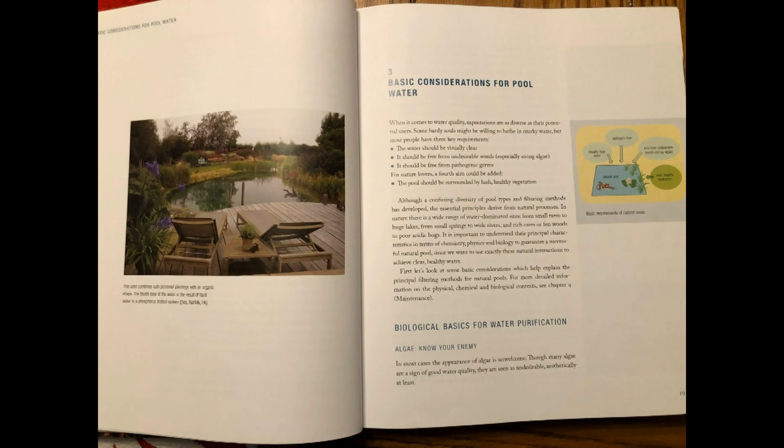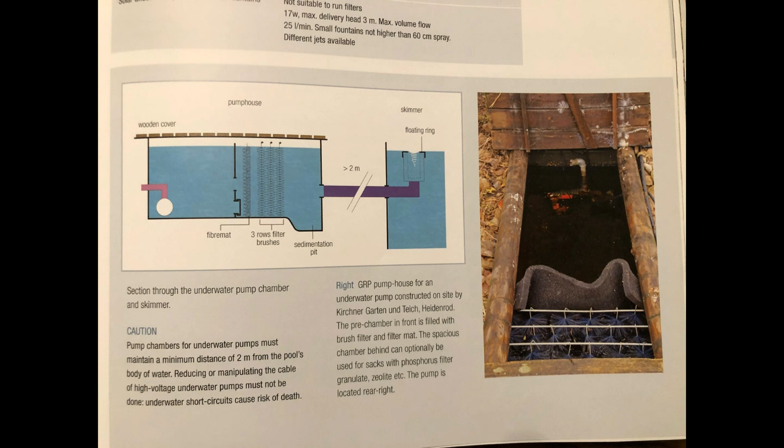Kircher and Thon walk you through the types of natural pools and different methods to maintain water quality. They provide technical guidance on sizing of pumps, pools, and treatment zones. However, note the units they use are standard international, not English. They cover the types of plants that can be used to clean your pool and keep your little ecosystem healthy.

The design I chose was a technical wetland using a waterfall for aeration. I have a 60 GPM pump which circulates water from a pond skimmer through a limestone biofilm zone, from which it overflows into the wetland section filled with cattails and reeds. After filtering, the water travels through a stream and returns to the pool via a waterfall.

In addition to the piping to the treatment zone, I also incorporate a recirc line to provide a current to push water back to the skimmer. The recirc line also contains valving to discharge directly from the pump to my yard for when I vacuum sediment from the pool floor.

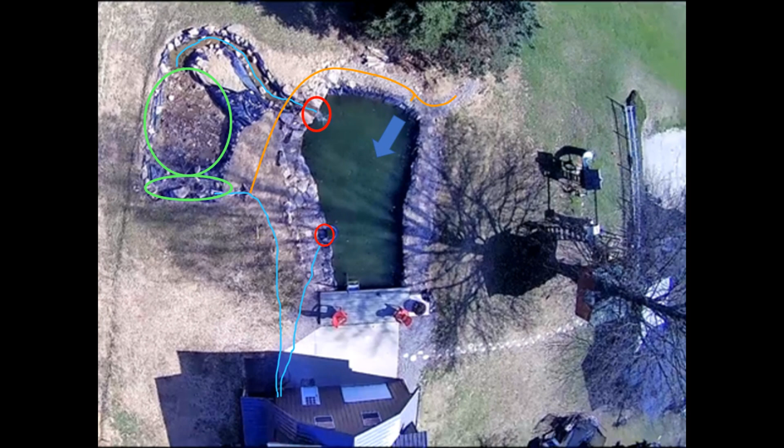The pool is 35 feet by 20 feet and slopes from 3 feet deep to 7 feet at the deepest point. The treatment zone is 40% of the size of the pool itself, which is 13 feet by 25 feet. Now here's how I did it.

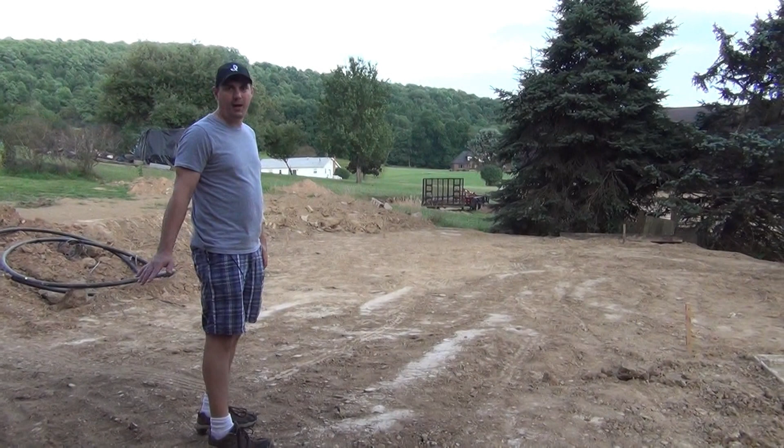As you can see, I've leveled the ground where I'm going to put my pool. And I've staked out the corners of my area that the pool is going to be in, but now we're going to give it a natural shape by laying down some garden hose and giving it some curves.

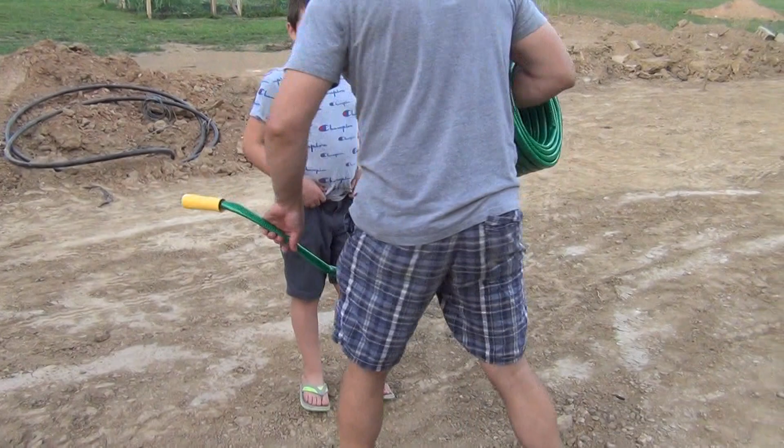Okay, so we're going to lay down the garden hose in between our stakes. Instead of laying string, I'm just going to use an imaginary line between the two stakes. Kind of give it a nice curve, but not go too far in or out of that line. All right, so we'll lay down the garden hose, which is stiffer than a rope, and it'll give us a nice smoother edge. Try and get the curves out of it.

Okay, once you have your layout set with your hose, then you get some marking spray paint, and you're going to go ahead and trace the hose.

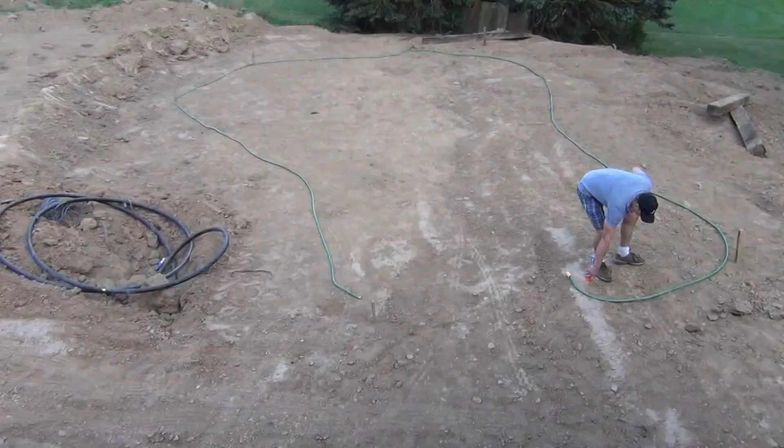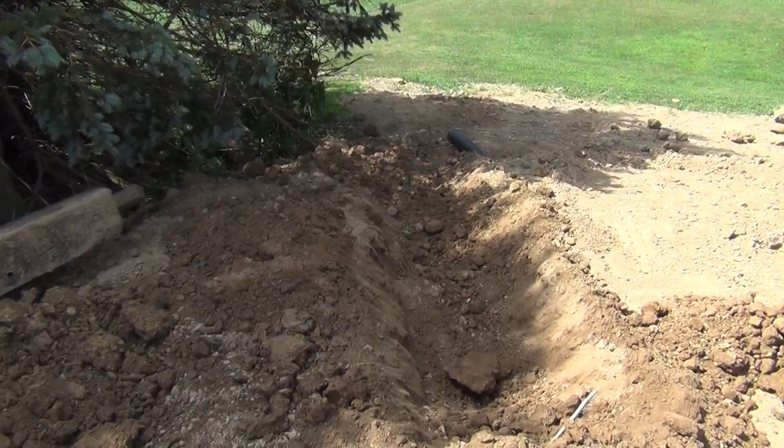The next step is to dig a trench around the perimeter of your pool, which will be used to hold your liner in place. I dug a trench in the corner for my overflow to go. The trench is about a foot deep. It's just enough to hold the liner in place once rock is placed on top of it.

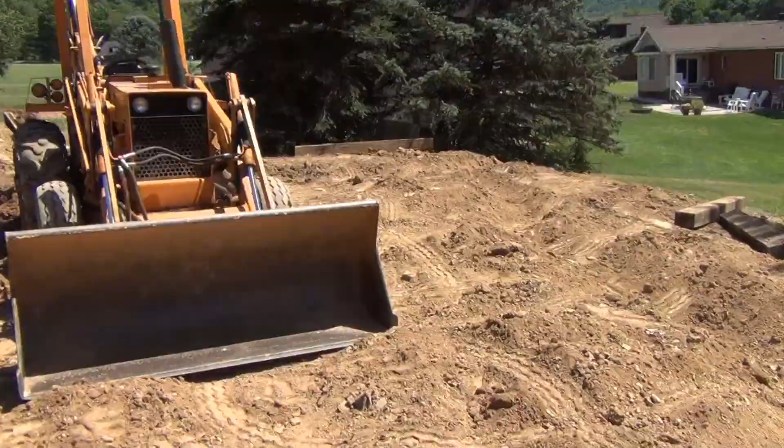Alright, now I'm going to work out and find out where the bottom of my slope is, because I have to angle it down. Don't want straight down, again, don't want too shallow. So at this shorter, shallow end, it's only 1 foot, and then the deeper end, the base of the slope is wider. So I got 1 foot here and then 2'4" over there.

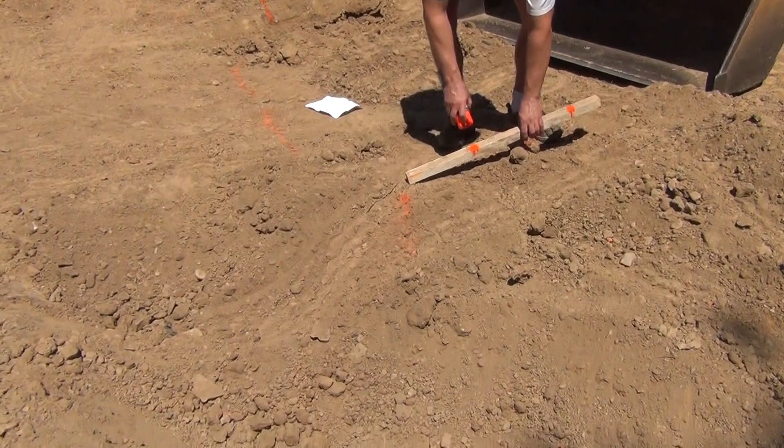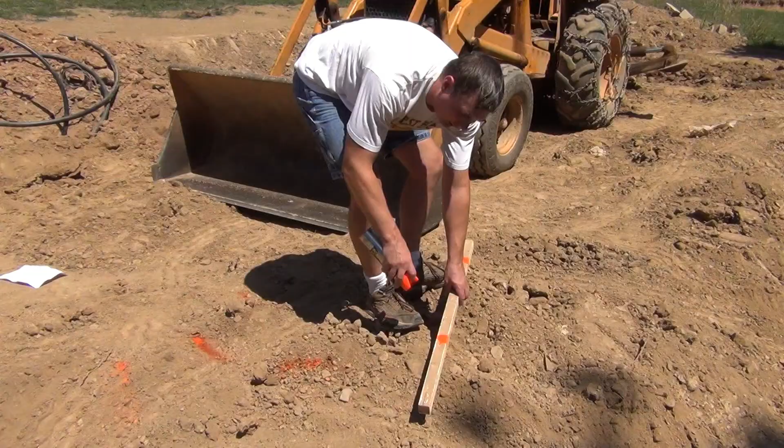So I'm just going to work my way around and determine where my perimeter is off of where the bottom of my slope will be. And I'm just kind of eyeballing this from where my line was. And now I'm out here towards the deeper end, where it gets deeper. Now I don't want to go 1 foot, I actually want to go further, so I'm going to go about halfway now.

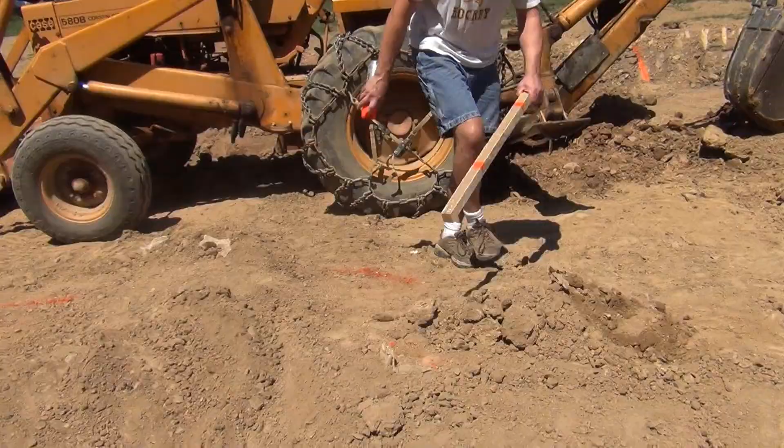Next easy line. And now I'm at the deepest section for my mark. I'm going to go my deepest slope. And that's going to go the whole way off of this back wall. Okay, I connected the dots.

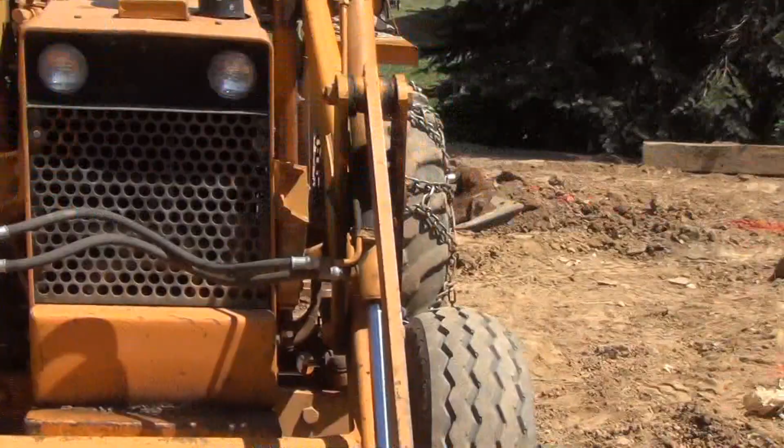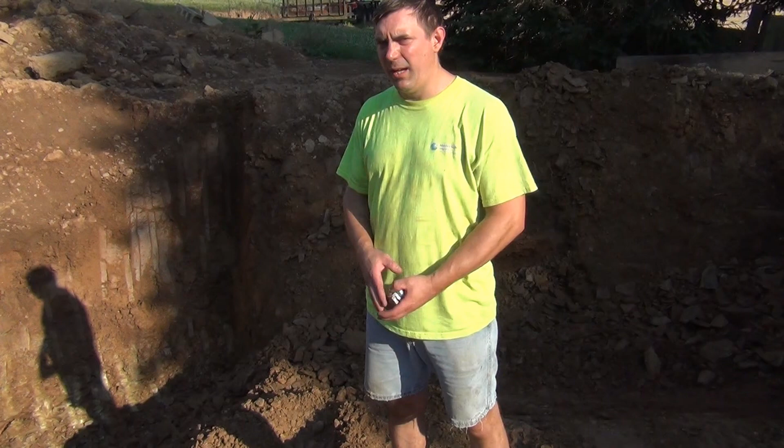This section back here is where my waterfall will go, and it's going to be straight down, so I'll be digging that back further. Now it's time to start digging. Okay, so I've dug down far enough. I'm going to install my retaining wall.

And the purpose of my retaining wall is so I can have a vertical wall in my deep section below my waterfall. So rather than hauling all this dirt out and making this too steep, I'm going to build my retaining wall first and then dig this section out and dump it behind the retaining wall.

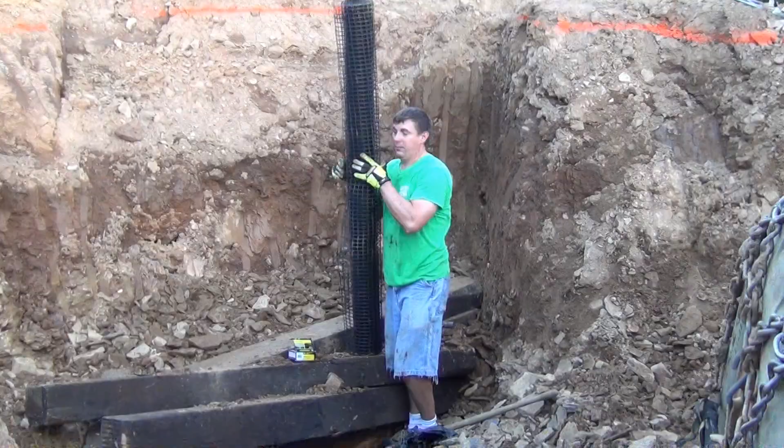Ten-inch spikes, 4 per tie. Okay, so I got 4 rows of ties down. Now I'm going to start reinforcing it. I'm using Geogrid. It's a fiberglass reinforcement. It's really good for reinforcing walls, so I'm going to lay this down in a couple stages, and this is going to be my first stage.

Okay, now that I got it cut and laid down, I'm going to nail it down, and then when I lay the tie on top of it, the weight of the tie plus the spikes going through will also secure it, besides the little nails. This is kind of just to hold it temporarily.

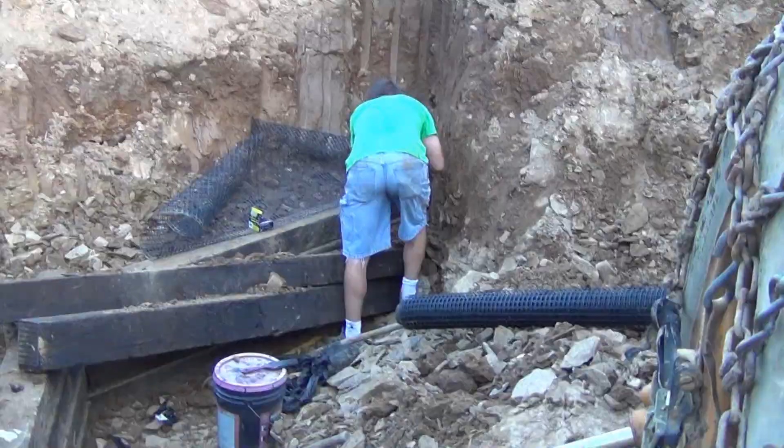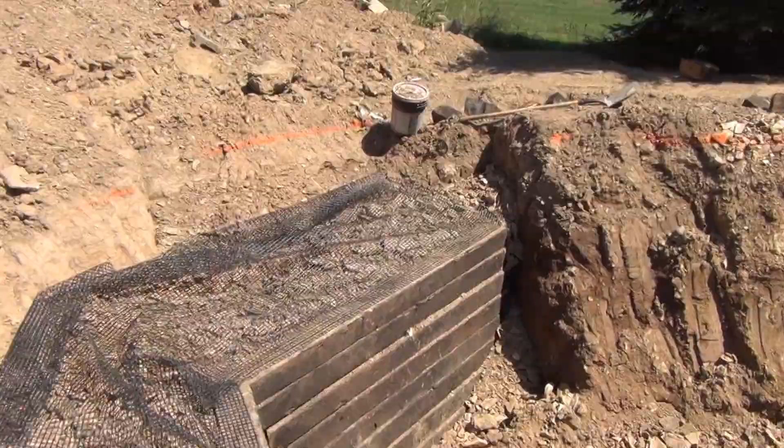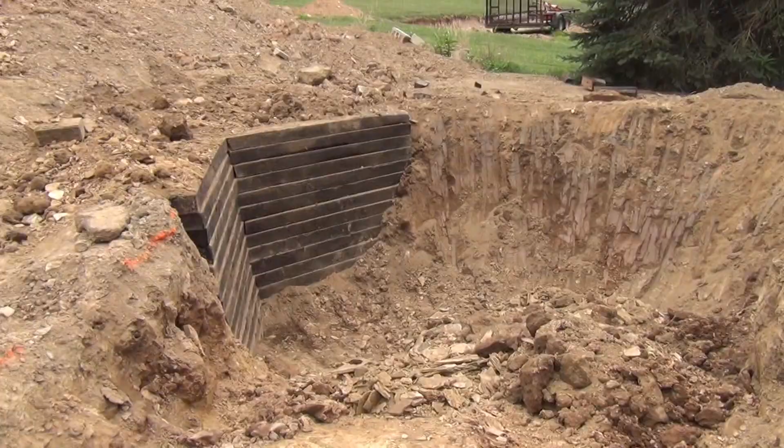Okay, so I've added 6 more rows of ties. I'm putting another row of Geogrid down, and I'll finish up the last 3 or 4 rows here to get to my final height for the retaining wall. Also excavated some more dirt out of the dig site. Had to work it down a ramp. Okay, after completing the wall, I backfilled it. 14 rows of ties, and start shaping the deep end.

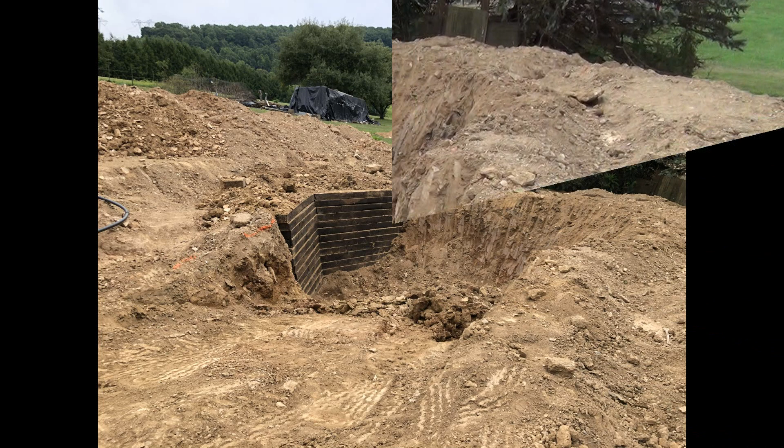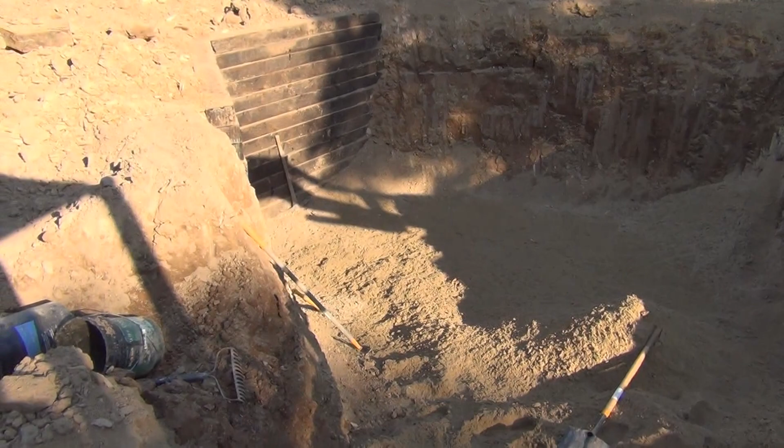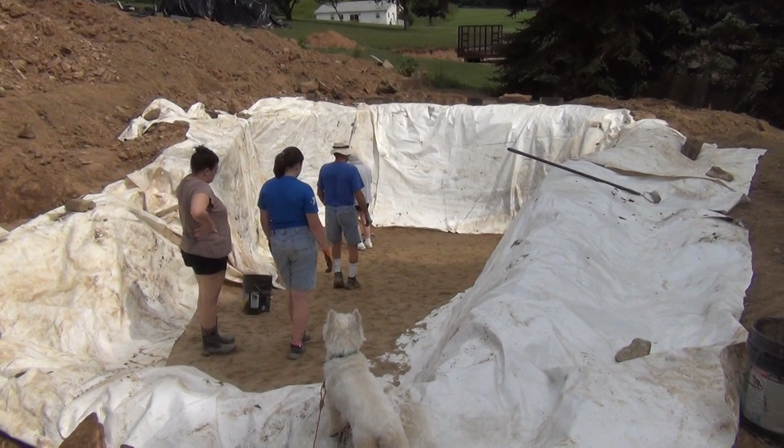Okay, so I raked all the large rocks, which I have tons of sharp rocks, which makes me nervous, but I raked all the large rocks out of the lower, deeper section, and then I backed in the trailer and dumped sand, and now need to spread that out. After spreading out the sand, we laid a layer of extra plastic over the slopes to act as a buffer between the dirt and the liner.

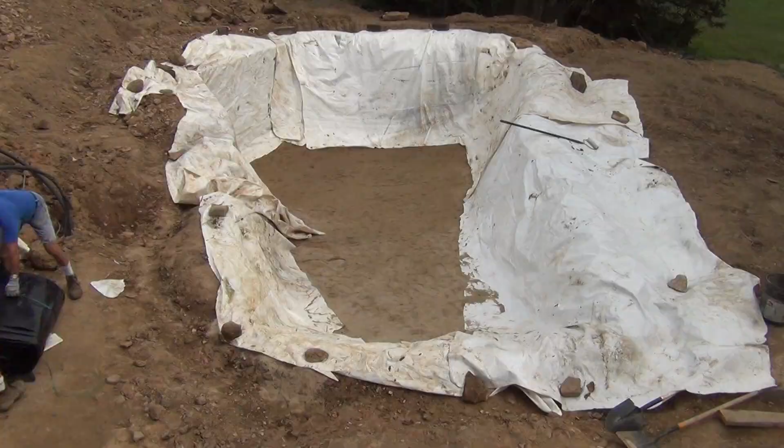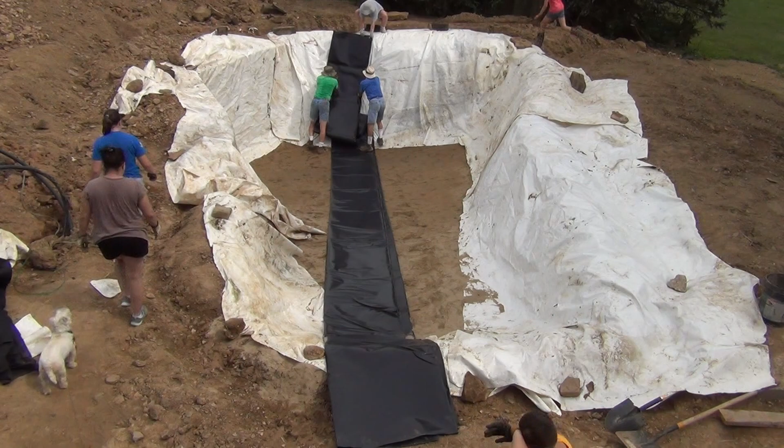The pool liner I used was 30 mil reinforced polyethylene, 50 feet by 43 feet, oversized to allow for slope and contouring. With the help of the family, we were able to maneuver it around, leaving slack to allow for settling when it's filled with water.

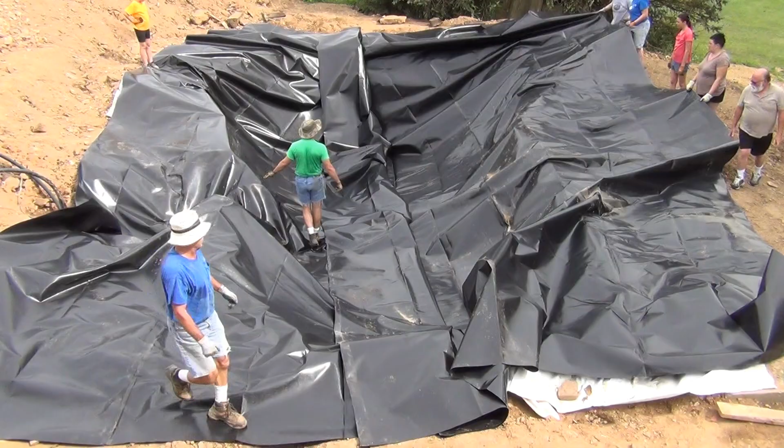A critical step is to make sure that you contour around the edges, leaving enough slack. Otherwise, the polyethylene may be stretched too much and tear. I went with reinforced polyethylene because it doesn't require an underlayment, and that helped keep the cost down.

The next step is to fill the perimeter trench with 2B stone. In addition to holding down the liner, the trench is also utilized to convey water around the pool rather than in it. It's designed to flow out the outlet trench on the far side. One mistake I made was to put too much stone in the trench. This made it difficult to fix sections of the liner that were stretched too tight.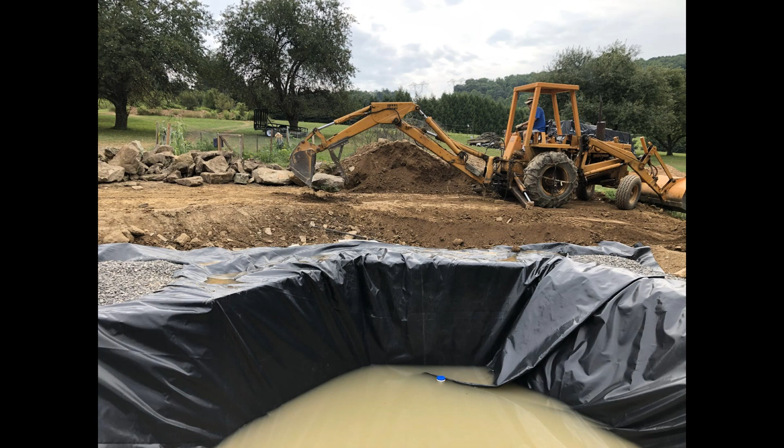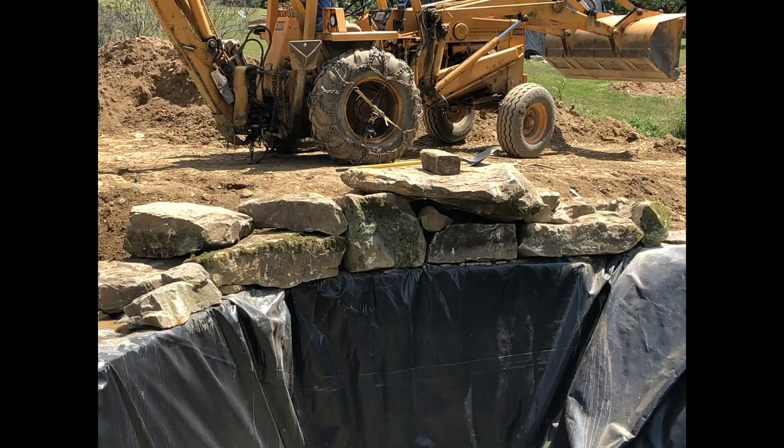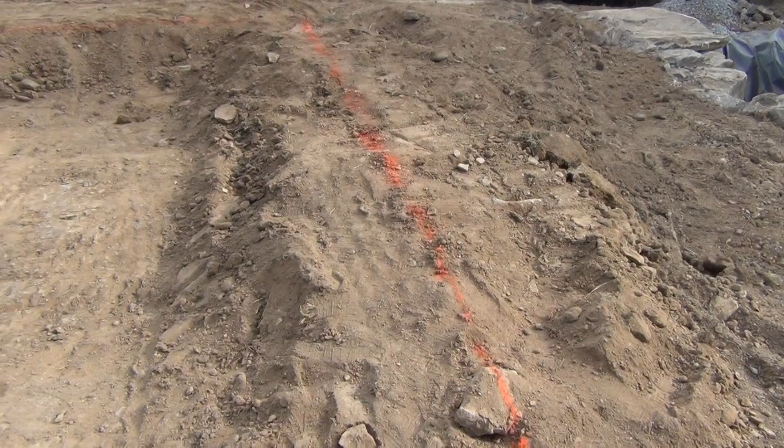After the liner was in place, I began filling the pool slowly. Then I began working on the stone landscaping and the waterfall feature. With the stone wall in place, it established the elevation of my treatment zone. I began marking and excavating that as well, as I did with the pool. I used a transit to survey the pool and the treatment zone.

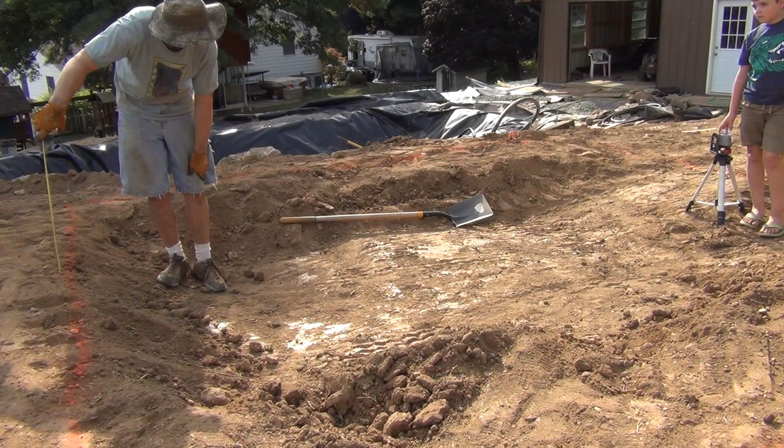Another tool that worked well was a laser level. I got this one at Harbor Freight for around $60. You can't see the laser line in the daytime, but you can see the laser dot. So if you spin it manually, you'll be able to get your elevation. Once the water elevation got high enough, I was able to confirm or adjust the elevation of the pool.

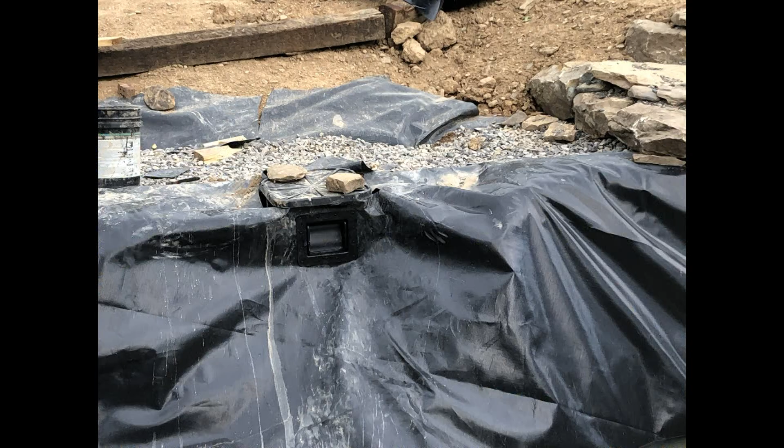At that point, I was able to finalize the elevation of my skimmer and connect a 2-inch polyethylene suction line to it. The skimmer I bought was a PS 4500 pond skimmer from pondliner.com.

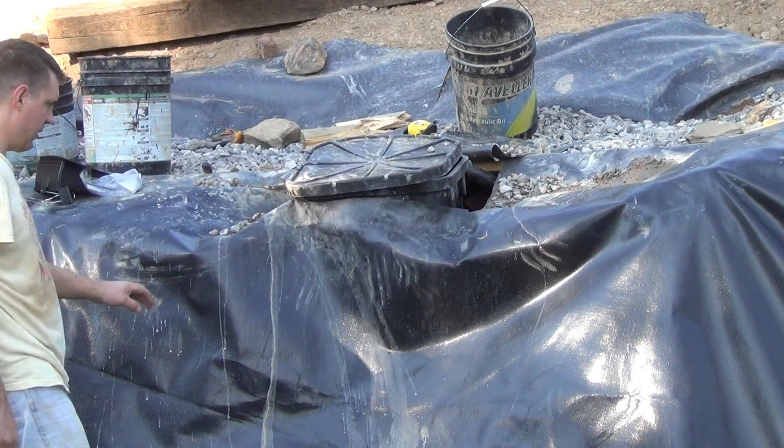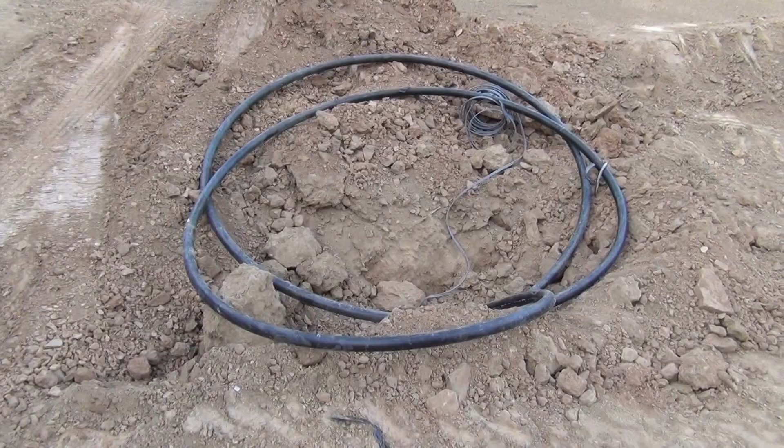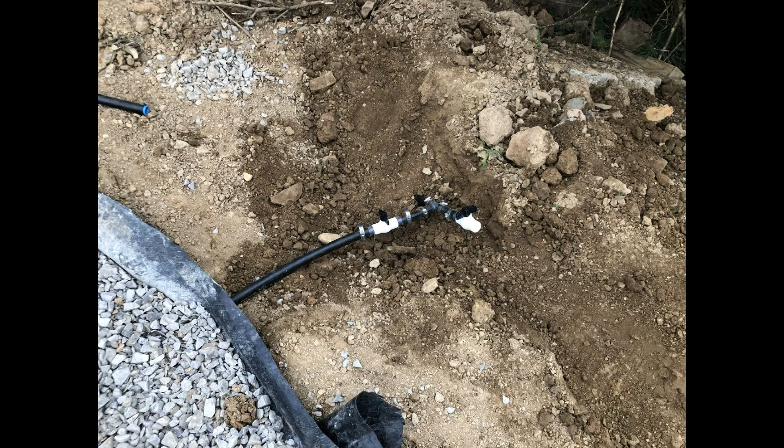The pool pump discharges to a 2-inch polyethylene line to the treatment zone, and also a side stream via a 1-inch polyethylene line located in a bulkhead port on the far side of the pool to create a return current to the skimmer. There was also a discharge line here for vacuuming. The pump I used was a Pentair Superflow pool pump, 3/4 horsepower, from Doheny's.

Back to the treatment zone. I dug the treatment zone 26 feet by 13 feet and 20 inches deep. There are 2 treatment sections. The first is a small biofilm treatment section where the water enters from underneath.

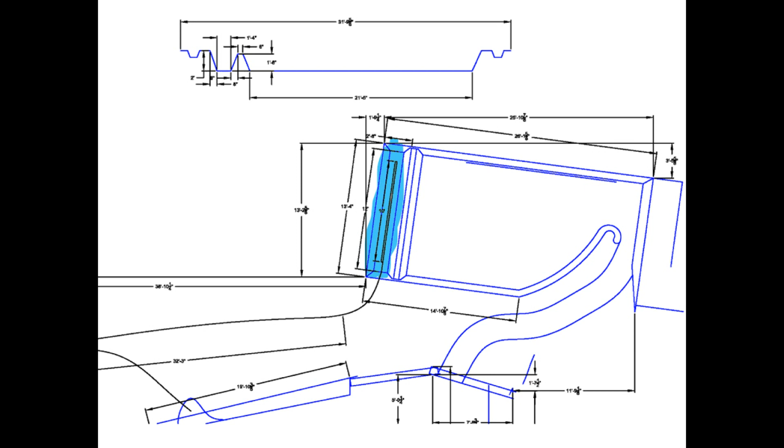It percolates up through the gravel and overflows into a technical wetlands. After being filtered and cleaned by the cattail roots, the water flows out into a small stream and back to the pool via the waterfall.

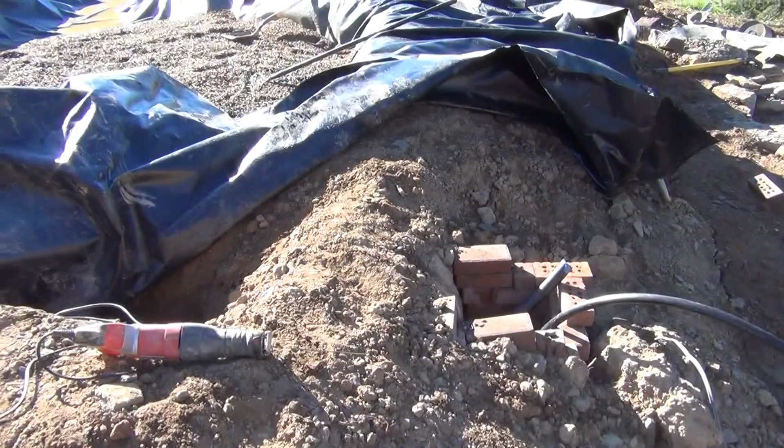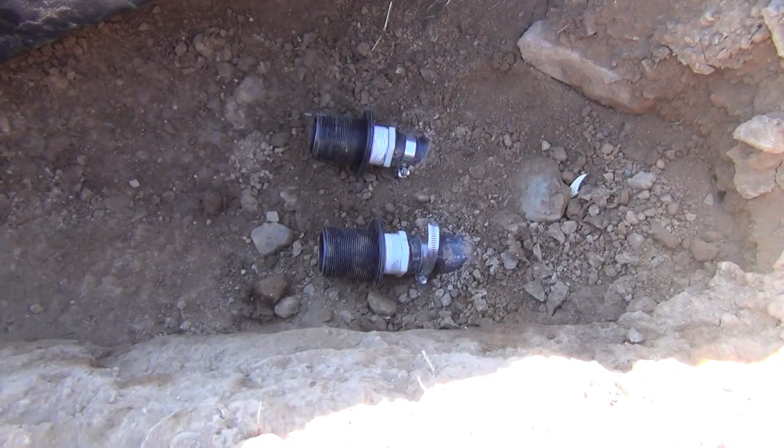I installed 2 pipes into the treatment zone. One was the supply from the pump discharge, and the other one was an underdrain for cleaning. I used bulkhead fittings, but these ended up leaking, so I ended up abandoning that and plumbed the discharge from the pump over the berm and down into the treatment zone, and I abandoned the underdrain.

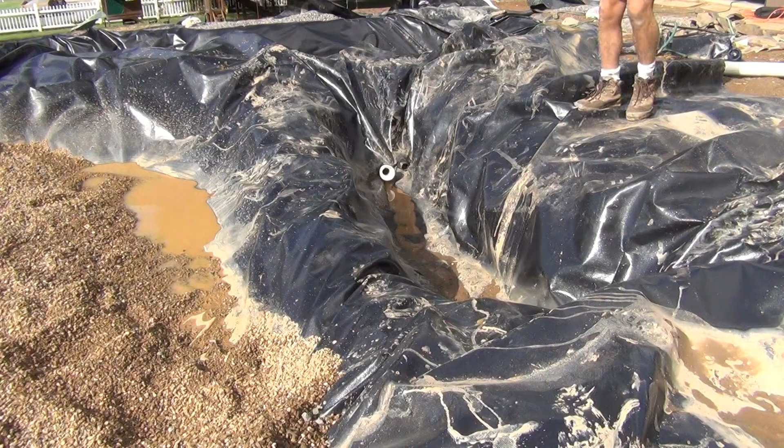I cut a 3-inch PVC pipe 8 foot long. I then marked 2-inch slots 8 inches on center on 2 lines 6.5 feet long at the 10 o'clock and 2 o'clock positions. The first 16 inches had no slots. Afterwards, I installed a 3-inch cap on the end of the pipe. I then installed the pipe in the treatment zone and connected it to the plumbing via a 2-inch by 3-inch reducer. I then glued it to the reducer.

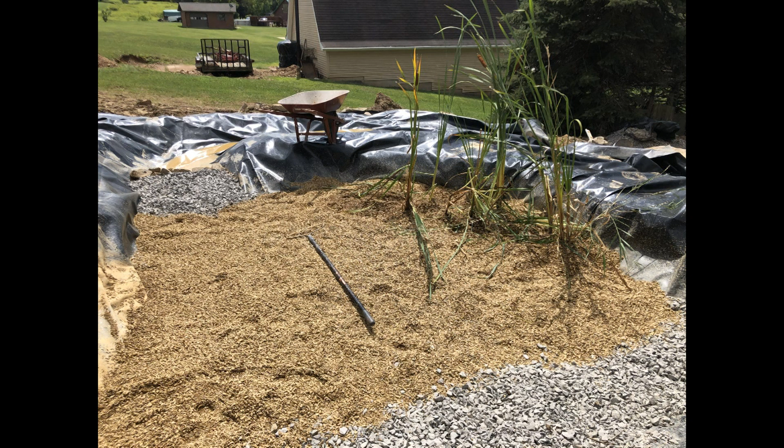I backfilled the Biozone with 2B limestone. I filled the wetland zone with 8 inches of coarse river gravel, followed by 6 inches of pea gravel. I then transplanted cattails and reeds I salvaged from nearby. Afterwards, I installed coarse river gravel and some pea gravel in the stream, along with some stones. Once the water level was high enough, I was able to prime and test the pump.

Here you can see the water percolating up through the limestone. The intent of the limestone is to raise the pH of the water and provide a place for beneficial bacteria to grow. Keeping the pH above 8 helps slow the growth of algae. In addition, the cattails and reeds compete for the nutrients, so the algae has nothing to feed off of.

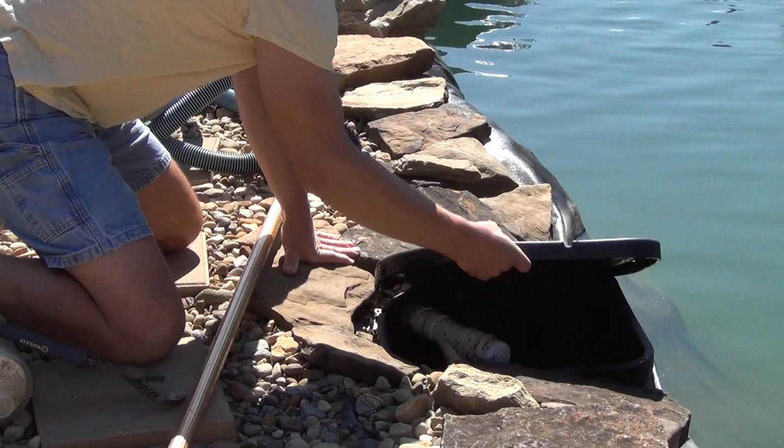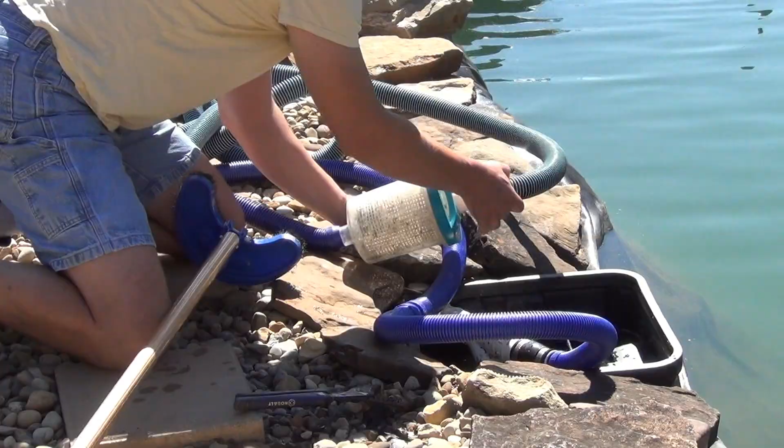Here's a look at the vacuum system. I installed a 1.5 inch ball valve off of a T within the skimmer box. I shut that valve and unscrew a cap on the other end of the T. I screw an adapter to the T threads and connect a standard 1 1/4 inch pool hose to it. I added an inline strainer to keep rocks and leaves from getting into the pool piping or pump strainer.

Before turning the pump back on, I closed the bypass line on the far side of the pool and opened up the discharge line that goes out into my yard. Then it's just like vacuuming a normal pool, except there's a little bit more silt.

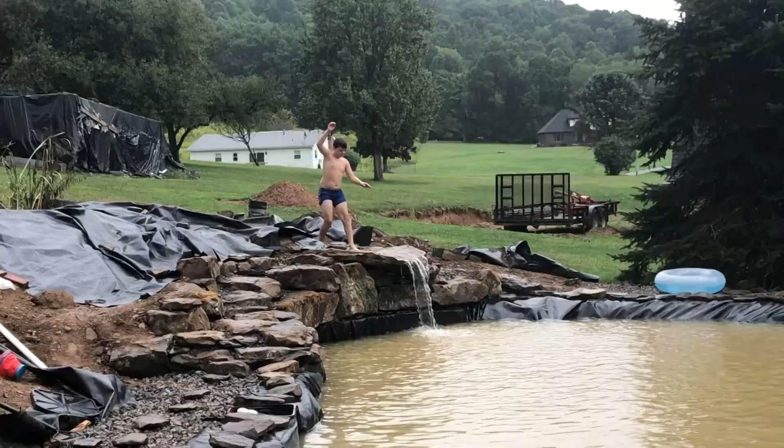This pool was a lot of work. I was fortunate to source all my landscape rocks and cattails from a neighbor down the road. I had a lot of silt in the pool when I first opened it. It took a few weeks to settle out, and then I vacuumed it out. You need to have a good source of makeup water. I ran my garage gutters into the pool underneath the deck and also have a well for backup.

The first year I built the deck and steps to get in and out of the pool. The following spring I built a larger deck around the fire pit. The following spring our family planted flowers and installed the landscaping you see here. What you see here is the culmination of a lot of work.

I spent somewhere around $4,000 to $5,000 on the whole project, which isn't too far off from the cost of an above ground pool. However, I do not need to add chlorine or chemicals. I just test the pH and add bleach to the pool to bring the pH up periodically. I recirculate the water through the bypass line until there is no free chlorine present before I send it back to the treatment zone.

I wasn't able to find any good videos on how to build a natural pool online, so I decided to do my own research on how it can be done and did it myself. I hope this video helps you learn how it can be done and maybe inspires you to take on a project of your own. It's a lot of work, but it's worth it.